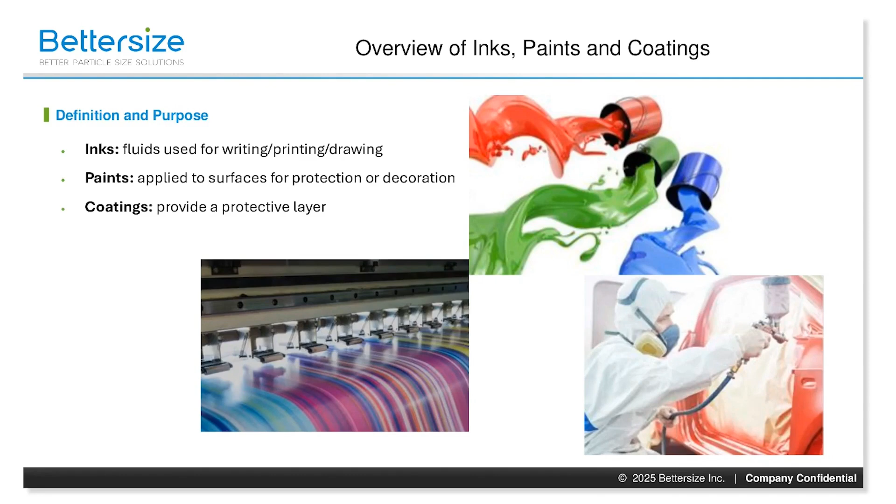Coatings are similar to paints, but are often designed for specific functional purposes beyond just appearance. They can provide protective, decorative, or functional properties to a surface, and are comprised of pigments, binders, solvents, additives, and fillers. These can include varnishes, lacquers, enamels, and other specialized formulations in industries such as automotive, aerospace, and construction.

So what do inks, paints, and coatings all have in common? They share the primary purpose of imparting color, protection, and specific functional properties to surfaces. They are comprised of similar fundamental components. Functionally, these materials rely on the effective dispersion of pigments to achieve uniform color and performance, and they often require stability to prevent settling, agglomeration, and other issues.

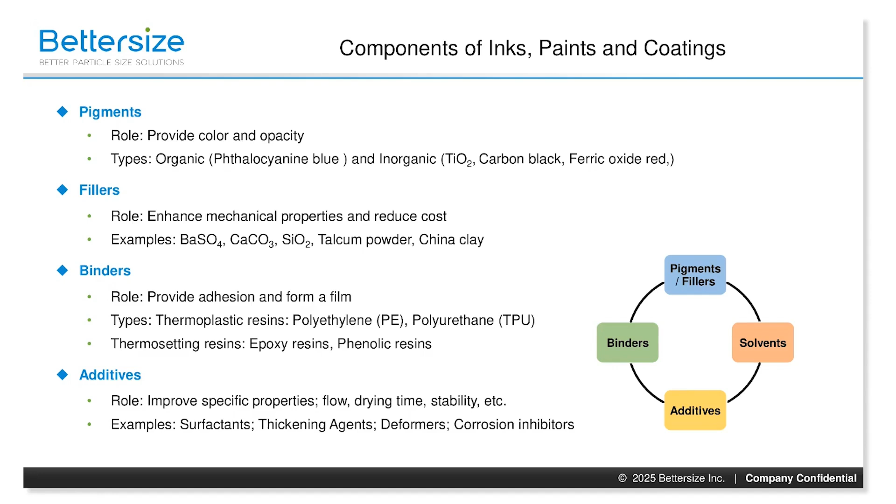Pigment is a material that exhibits a specific color because it selectively absorbs certain wavelengths of light. While many materials possess this property, pigments are stable at normal temperatures and have a high tinting strength, so only a small amount is needed to see the color when it's used on objects or mixed with a carrier.

Many of the critical properties of inks, paints, and coatings, such as their color strength, covering ability, surface finish, and durability, are determined by the sizes and shapes of the dispersed pigment particles.

So let's quickly review some definitions. What's a particle? A particle is a small unit of matter with defined physical properties such as mass, volume, and shape. Particles can widely vary in size and composition, ranging from subatomic particles like electrons and protons to larger particles like grains of sand. In the context of materials like inks, paints, and coatings, particles typically refer to the smaller solid components, such as pigments and fillers, that are dispersed within a liquid or solid medium to impart specific properties to the final product. Typical materials would include things like carbon black, titanium dioxide, and organic and inorganic pigments.

Now that we've defined what a particle is, here are some key particle parameters to consider. Particle size refers to a single value representing the measurement of the size of the diameter of an individual particle, while particle size distribution describes the proportion of particles of different sizes within a sample, not just the size of a single particle. This is often shown as a graphical representation. It provides information about the range, the ratio, and the distribution pattern of particle sizes across the sample.

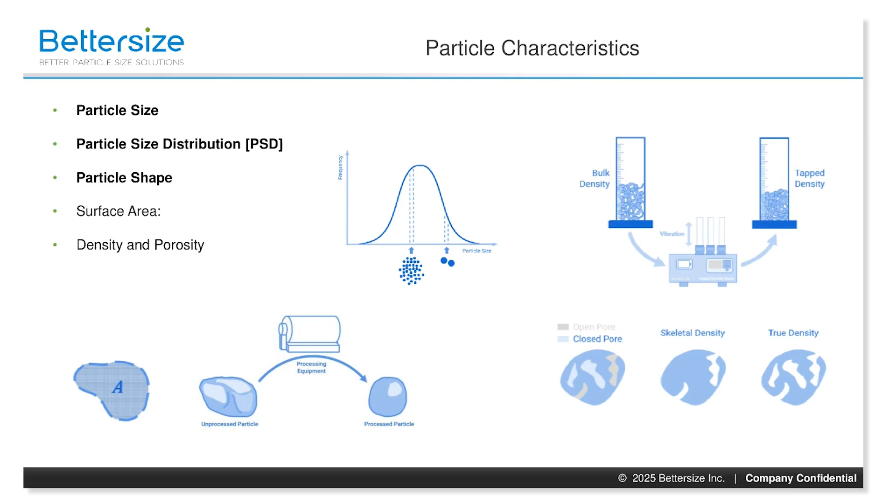I want to focus on particle size and the corresponding particle size distribution and particle shape, and their role in influencing pigment dispersion. Smaller particles are better dispersed and able to disperse more uniformly, and this can lead to even coverage. Irregularly shaped particles have larger surface area, which can enhance dispersion and stability. However, this can also lead to increased viscosity and potential settling.

If we move on to particle size influence on hiding power, opacity equals hiding power, so basically it's covering ability. Smaller particles have a larger surface area to volume ratio, as I've mentioned, and this allows them to scatter light more effectively. This increased scattering enhances the hiding power of the coating, making it more effective at covering the surface.

Particle size distribution: with a well-optimized distribution, you can get a mix of larger and smaller particles, and this can improve hiding power by maximizing light scatter and filling gaps in the coating.

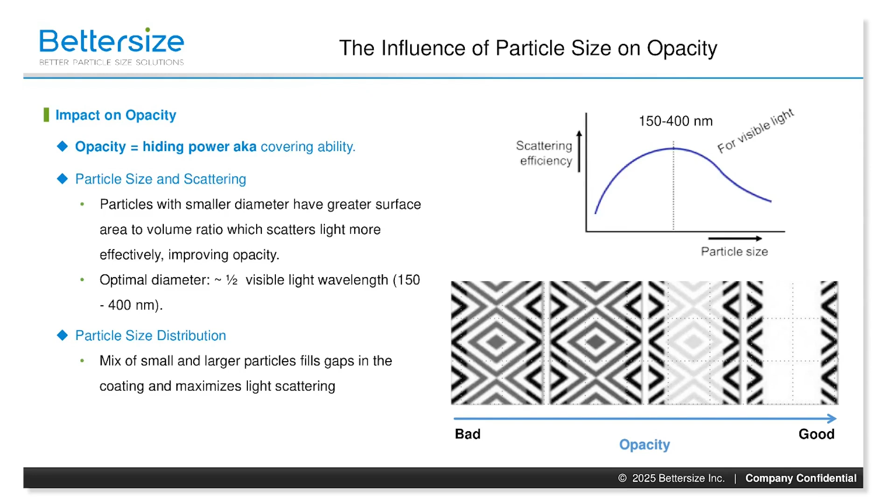So in summary, smaller particles generally enhance the hiding power of the coatings by scattering more light more effectively, while larger particles contribute less to the opacity. But optimizing the particle size distribution is key to achieving the desired level of hiding power within these materials of inks, paints, and coatings.

Moving on to the size and shape effects on the optical properties. Two phenomena govern both hiding power and the color strength of inks, paints, and coatings: light absorption and light scattering of the pigment particles within the material. Color strength refers to the intensity of color a pigment can impart to a material, which is directly related to the size of its particles.

Well-dispersed fine particles provide better color consistency and hiding power, resulting in vibrant color appearance, compared to larger, poorly dispersed particles, which tend to scatter light less effectively, resulting in a weaker color strength, leading to a more muted or dull appearance.

Particle shape: spherical particles can provide a smooth and uniform dispersion, which helps in achieving consistent color strength. Irregular shaped particles can scatter light in multiple directions, which can actually enhance the color strength. So an ideal distribution is a well-balanced distribution of particle size and shapes, which can enhance color strength by maximizing light absorption and scattering and result in more vibrant and intense colors.

Particle size analyzers like laser diffraction can be used to measure the particle size distribution of a pigment, which can then be correlated to its color strength.

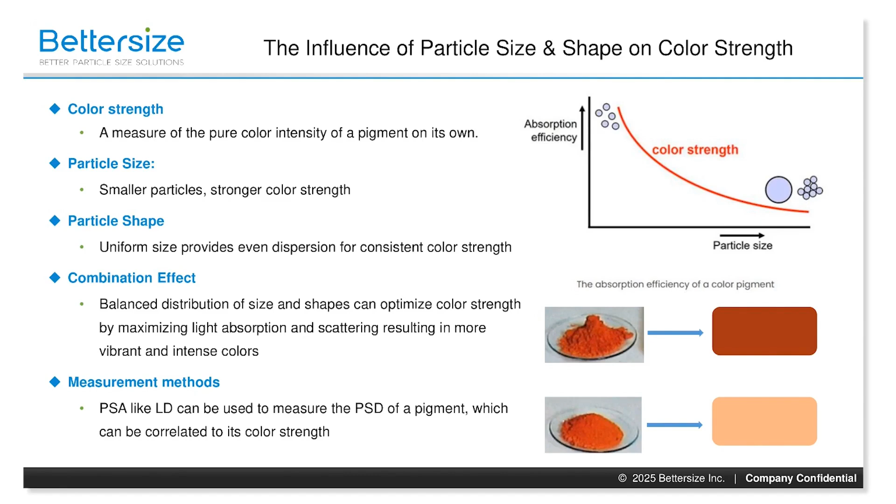Particle size and shape impact other characteristics of these materials. There's viscosity, where smaller particles with higher surface area increase the viscosity of the formulation, which affects the ease of application and leveling. However, irregular shapes can increase interactions with the surrounding fluid, and this can also lead to higher viscosity.

In terms of mechanical properties, smaller particles enhance smoothness and durability. However, irregular shapes can improve mechanical interlocking, enhancing properties like adhesion and scratch resistance. In terms of durability, smaller particles fill voids effectively, creating denser and more durable materials. But irregular shapes can enhance wear resistance and withstand mechanical stresses.

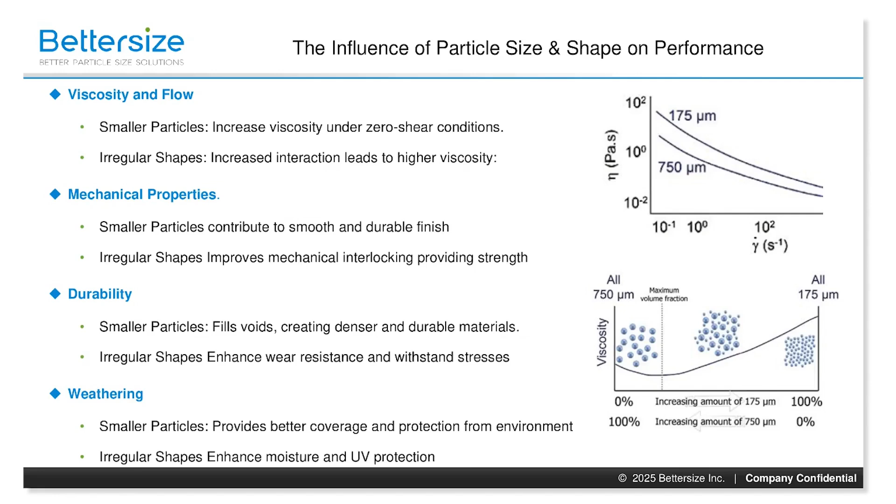In terms of weathering, smaller particles provide better coverage and protection against environmental factors. However, irregular shapes can enhance protection against moisture and UV radiation. In summary, both particle size and shape are critical factors that influence the dispersion, stability, hiding power, mechanical properties, and final appearance of inks, paints, and coatings. Proper optimization of these factors is essential for achieving high-performance formulations.

So next, I want to discuss the importance of stability and zeta potential. And of course, what is zeta potential? Zeta potential is not a property of the particle, but of the system comprised of the particle and the dispersion medium. Zeta potential is a measure of the electrical potential at the slipping plane of the particle in the medium. It indicates the degree of electrostatic repulsion or attraction between the particles.

High zeta potential means strong repulsion between particles, like common magnetic poles, which help prevent agglomeration and ensures stable dispersion. It's a critical parameter for understanding and controlling the stability of colloidal suspensions, such as those found in inks, paints, and coatings. There are many factors that affect zeta potential, including pH of the suspension, the ionic strength of the solution, the type of electrolyte ions, the temperature, which can affect the viscosity and dielectric constant of the medium, as well as the diffusion and mobility of the ions in the suspension.

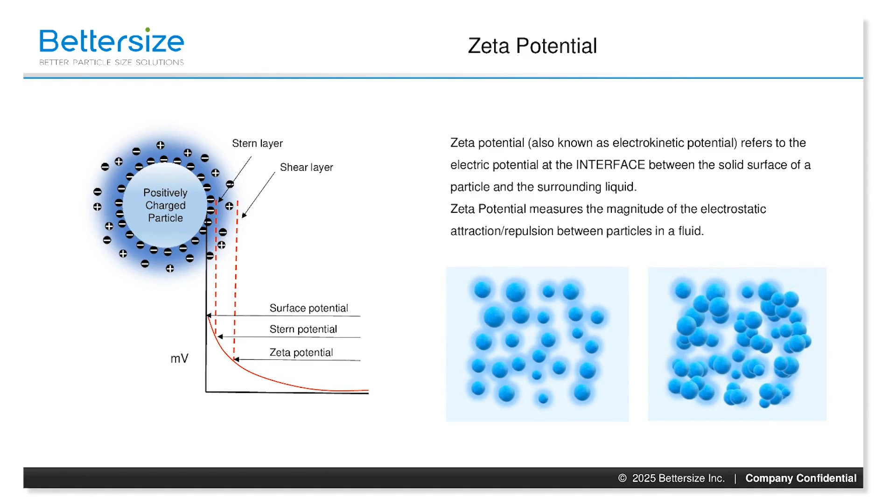Particle concentration can lead to particle-particle interactions, which can affect the overall zeta potential. Presence of surfactants, polymers, solvent properties, and surface modification of the particle with coating or functionalization can alter the surface charge and thus the zeta potential.

So what is the importance of zeta potential? Having high zeta potential controls particle stability. High zeta potential, either positive or negative, creates strong electrostatic repulsion between the particles. This repulsion avoids clumping and aggregation and prevents particles from coming together, forming stable suspension. Maintaining the high zeta potential ensures that particles remain evenly dispersed in the medium, preventing them from settling. It maintains that uniformity.

Electrostatic stability involves maintaining the forces that keep the particles apart, and this will prevent them from settling at the bottom of the container. By adjusting pH and conductivity, manufacturers can achieve the optimal zeta potential for stable dispersions. Using dispersing agents such as surfactants and stabilizers can be added to formulations to improve the electrostatic or steric repulsion between the forces, and this further enhances stability and prevents aggregation.

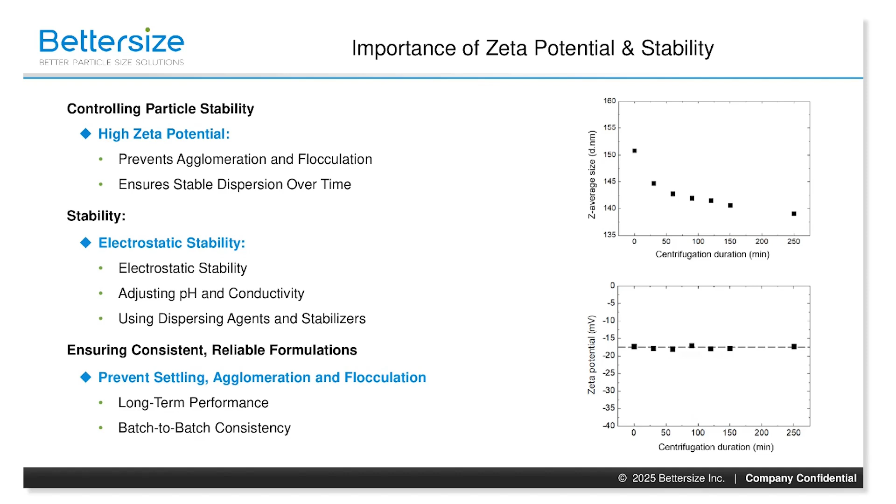By ensuring consistent and reliable formulations, it's dependent upon preventing settling, agglomeration, and flocculation. So manufacturers can ensure that they don't settle, aggregate, or flocculate, and maintain the properties throughout storage and application. Proper control of zeta potential and stability ensures that each batch of product has the same uniformity, performance, and quality, minimizing variations and defects.

So developing high quality inks, paints, and coatings involves navigating a range of formulation and processing challenges. Understanding and addressing these issues with targeted solutions ensures optimal performance and consistency across applications.

Common formulation challenges include achieving consistent particle size distribution. Here, the challenges involve smaller particles which may aggregate, forming large clusters that affect performance. Part of the solutions involve using advanced particle size analyzers to monitor and control particle size distribution, and employing dispersion techniques to break up aggregates and ensure uniform particle size.

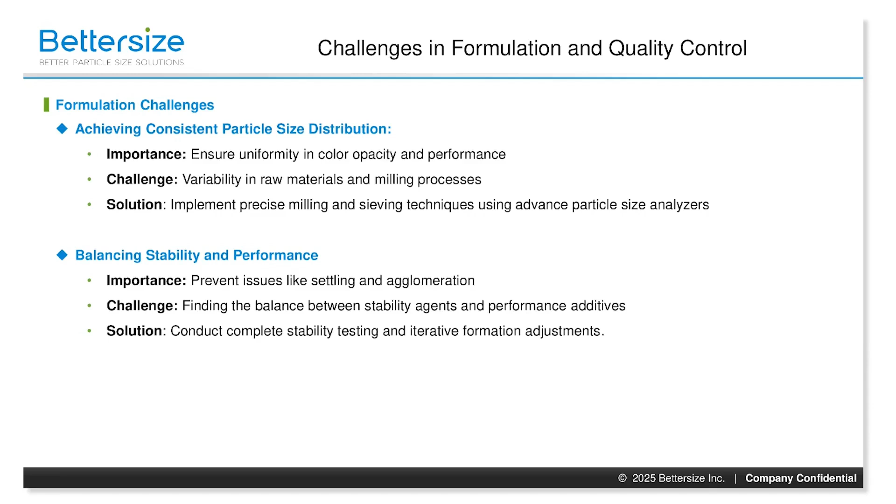In terms of balancing stability and performance, the challenge is when environmental factors such as temperature and humidity can affect the stability and performance. By conducting stability testing under various conditions, you can identify the optimal formulations and use stabilizers and performance enhancers that are compatible and synergistic.

In terms of processing issues, the goal is to prevent sedimentation and caking. This will ensure long shelf life and uniform application. The challenge is that particles can settle over time, leading to a separation of the components. And high viscosity formulations may be prone to caking, forming hard lumps, and are difficult to redisperse.

Solutions include using thickeners and stabilizers to maintain the suspension and prevent sedimentation. Controlling viscosity ensures a smooth flowing consistency, and optimizing storage conditions such as temperature and humidity to reduce the risk of caking. Another processing challenge is to ensure uniform mixing.

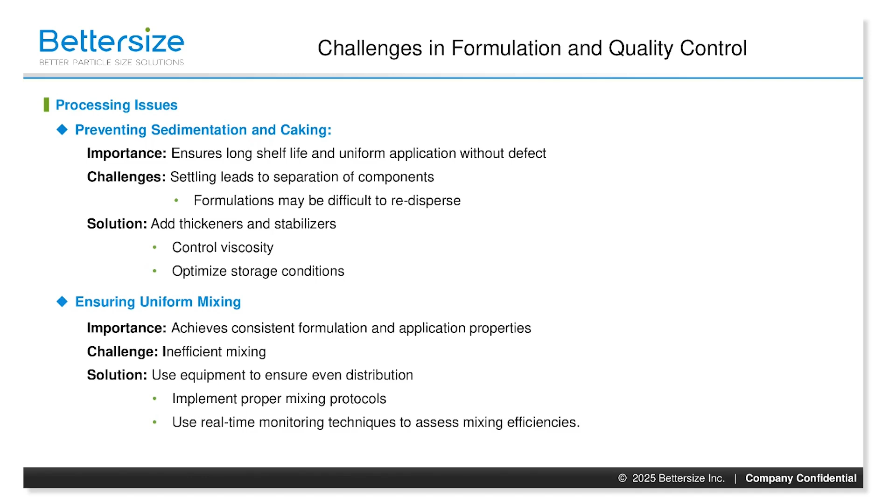It's important that we achieve consistent formulation and application properties to know that all components are evenly distributed. Inefficient mixing can lead to uneven distribution of the pigments, binders, and additives, and this will affect color and performance. This is especially important in large batches, as this may present difficulties in achieving thorough mixing. Solutions include mechanical mixers to break up the clumps and ensure even distribution. Using real-time monitoring techniques to assess mixing efficiency is important, and you can adjust the parameters as needed.

In terms of quality control, the goal is to maintain batch-to-batch consistency to ensure product reliability and customer satisfaction. Challenges arise from variability in raw materials and process conditions, which can lead to differences in color, viscosity, and performance.

Solutions include implementing strict quality control measures, including incoming raw material inspection and testing, developing and adhering to SOPs for production processes, and performing regular calibration and maintenance of equipment to ensure accuracy and reliability.

We also address environmental factors in order to maintain product performance under varying conditions, including temperature, humidity, and exposure to light. These environmental factors cause degradation of pigments, binders, and additives, leading to changes in color, stability, and performance.

Solutions include conducting environmental testing to assess the impact of these different conditions on product stability and performance, using robust formulation additives that are resistant to these environmental factors, and optimizing packaging to protect the products from external influences.

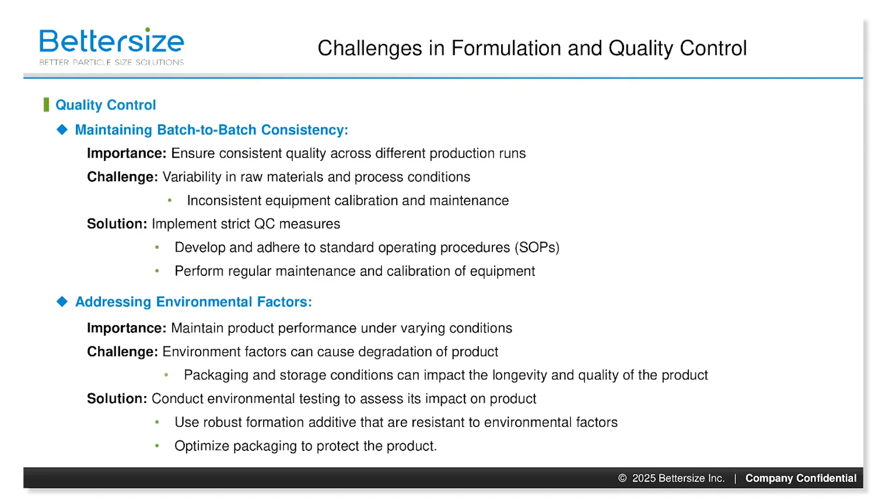A solution to address the challenges in formulations and quality control is to employ advanced characterization techniques. This provides detailed insights into particle properties and formulation performance, enabling precise control and optimization.

Examples include laser diffraction, which measures particle size distribution, ensuring uniformity and consistency; dynamic light scattering, which analyzes particle size and distribution in colloidal systems; and zeta potential measurement, which assesses the electrostatic stability of particles, preventing aggregation.

Rheology analysis evaluates the flow behavior of formulations, optimizing viscosity and application properties. Electron microscopy provides information on particle size, morphology, and surface topography.

Static multiple light scattering characterizes the stability of dispersions. Image analysis provides particle size, shape, and distribution information. And BET, Brunauer-Emmett-Teller, provides information about the particle size and porosity of a material.

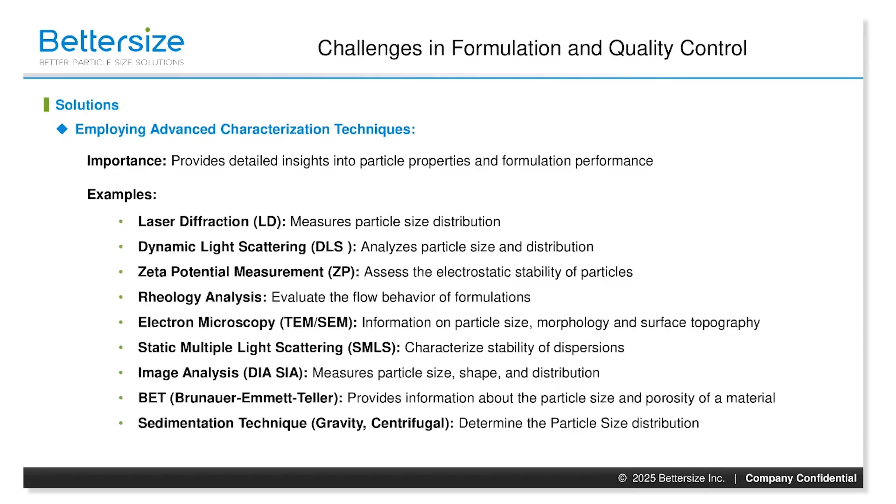Solutions to common challenges include optimizing formulation parameters. This enhances product performance and consistency by fine-tuning the composition and processing conditions.

One example would be to adjust the pH, which ensures optimal zeta potential and resulting stability, preventing issues like agglomeration and sedimentation. By selecting the appropriate stabilizers, this can enhance the dispersion and prevent the aggregation.

Fine-tuning the additive concentrations will balance performance and stability without compromising either aspect. Ensuring the right balance of these additives to achieve desired properties will add to the durability, gloss, and adhesion of these materials.

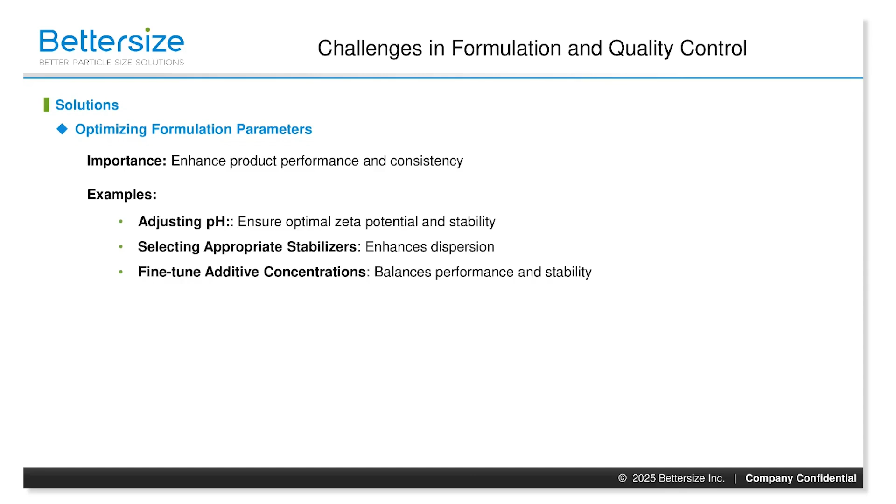So as we wrap up part one, let's highlight the critical aspects that impact the performance and quality of inks, paints, and coatings: the importance of particle size and shape, the role of zeta potential and stability, and the common challenges and solutions in formulation and quality control.

I hope I've helped you understand the importance of particle characterization and how to enhance and improve these products through particle analysis. Now I'll hand this over to my partner, Wei-Chen Gan, to explain how you can use particle size distribution, zeta potential, and stability analysis with some interesting case studies in part two of this presentation.

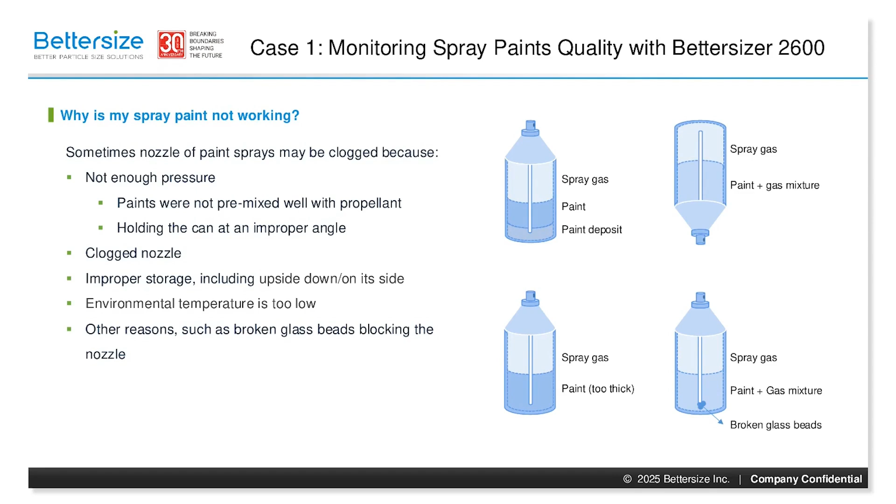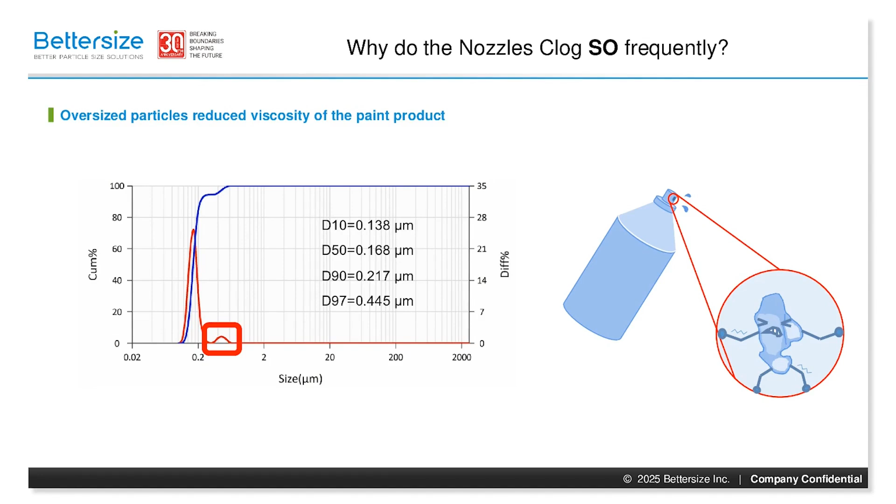These oversized particles can disrupt the optimal packing of smaller particles, reducing overall viscosity and leading to inconsistent flow and clogging. The animation on the right shows how agglomerates clog nozzles, leading to spray paint failure. The Bettersizer 2600 helped this paint provider identify and quantify these oversized particles, allowing them to adjust their process and solve the problem with an optimized grinding setup and finer filtration.

Now, let's talk about the Bettersizer 2600 laser diffraction particle size analyzer itself. Its tagline, 'Better particle sizing for every need,' really sums it up. This award-winning instrument, recognized with the 2024 i-NOVO Award, offers unparalleled measurement capabilities with its modular design, from paint suspensions

to pigment dry powders. With its unique optical design, the Bettersizer 2600 boasts an exceptionally wide particle size range, handling everything from 0.02 to 2,600 microns with wet dispersion and 0.1 to 2,600 microns with dry dispersion. Beyond size, the Bettersizer 2600 also measures particle shape, another crucial factor, thanks to the powerful PIC-1 image analysis module.

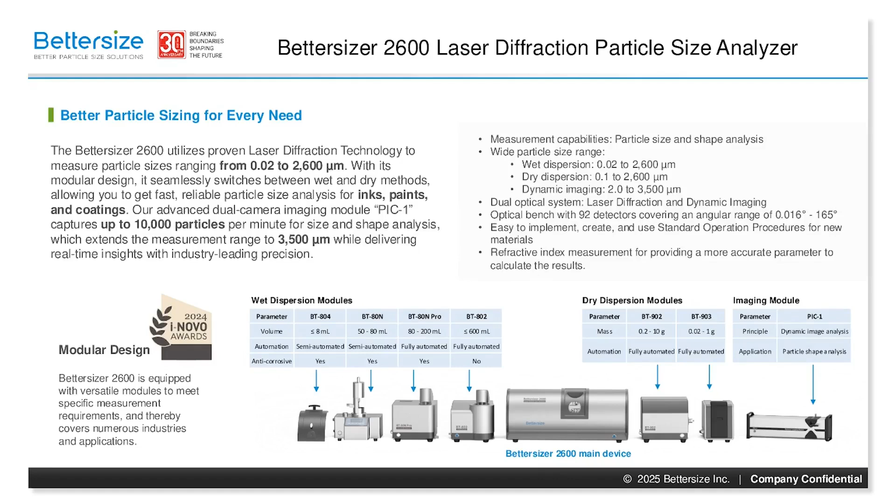For even larger particles, its dynamic imaging capability covers 2 to 3,500 microns. This versatility is achieved through its unique combination of laser diffraction for rapid size analysis and dynamic imaging for detailed shape information.

As a summary, let's talk about how we can measure particle size to optimize quality inspection. Traditional methods like sieving and filtering have long been an important part of paint production processes. Sieving physically separates particles, which is essential. However, it presents some challenges, especially when dealing with fine particles around 40 microns and below due to issues like

mesh size limitations and particle agglomeration. It can be difficult to handle these fine materials effectively, and the resolution and accuracy of sieving can be limited. While sieving provides a systematic and reliable process, the results themselves can lack the precision needed for modern formulations.

That's where the Bettersizer 2600 comes in. This advanced particle size analyzer allows us to precisely measure and control particle size distribution, ensuring consistent spray paint quality and minimizing those frustrating issues.

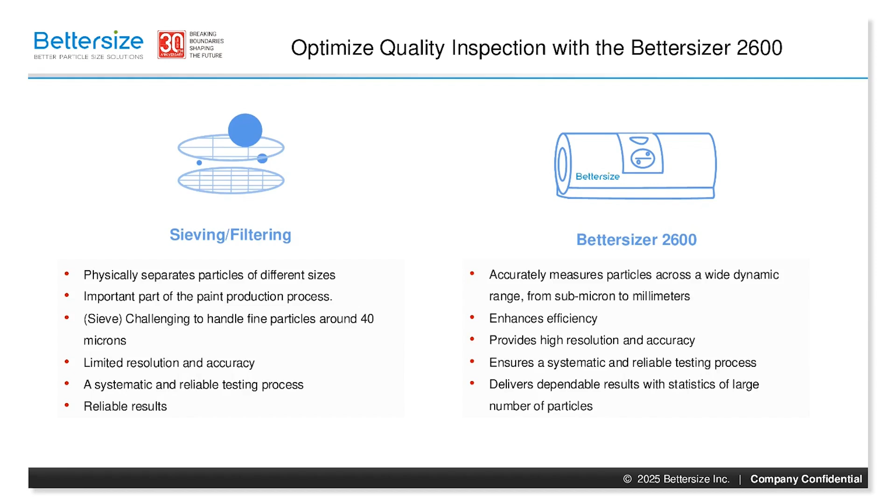Like sieving, it ensures a systematic and reliable testing process, but unlike sieving, it delivers dependable results with detailed statistics from a large number of particles. This allows for more precise quality control and optimization of your paint formulations.

We have seen how the Bettersizer 2600 revolutionizes particle size analysis in spray paints. Let's move on to our second case study, evaluating ink quality with a zeta potential test of the BeNano series.

Our second case study focuses on inks and the critical role of zeta potential. As the subtitle suggests, we are investigating nano-sized pigment dispersibility and stability in inks, a core challenge in ink formulation. A stable dispersion brings several key benefits: it prevents clogging, ensures consistent color output, maintains the correct ink viscosity, improves print resolution, and even extends shelf life.

This image on our right illustrates some common consequences of unstable dispersions: sedimentation, viscosity changes, and flocculation. In the following discussion, we will see how the BeNano instrument helps us understand the suspension stability to achieve optimal ink performance.

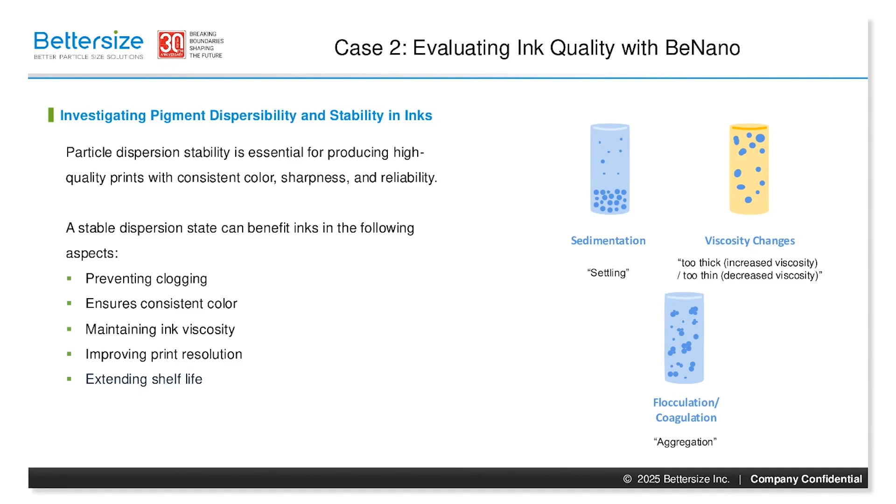Understanding suspension stability hinges on zeta potential. As mentioned by my colleague Dr. Barnum, the image on the right explains what zeta potential is: the electrokinetic potential at the outer layer of a particle. The zeta potential affects the concentration of charges around the particle, thus affecting the charge stabilization effect.

This chart on the left, based on empirical observations, demonstrates the direct impact of zeta potential on suspension stability, revealing the following change: as the absolute value of zeta potential increases, the suspension system becomes more stable due to charge stabilization. However, please note that the values listed here serve as general guidelines, not absolute thresholds.

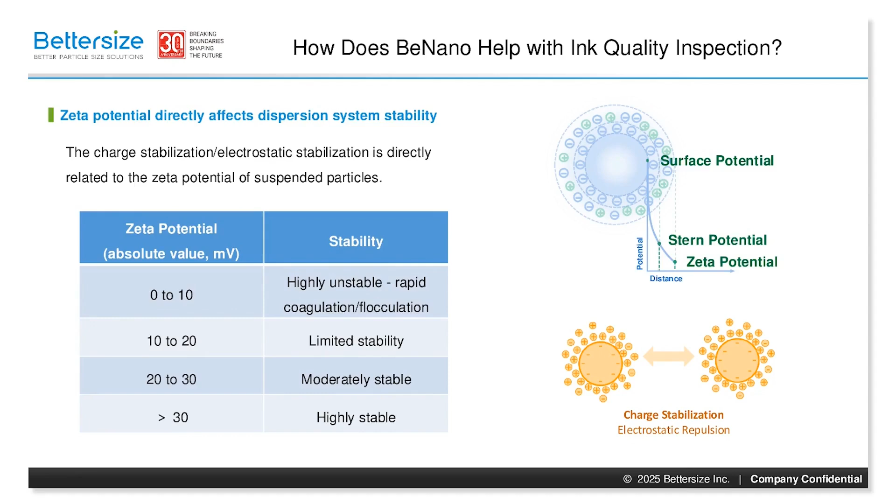Knowing the zeta potential lets us make targeted adjustments for ink stability. We can make the adjustment in several ways. For example, in water-based inks, we can change the environment's pH by adding acids or bases, which alters the surface charge of the pigment particles.

Or we can also change the ionic strength by adding salts. This affects the double layer around the particles.

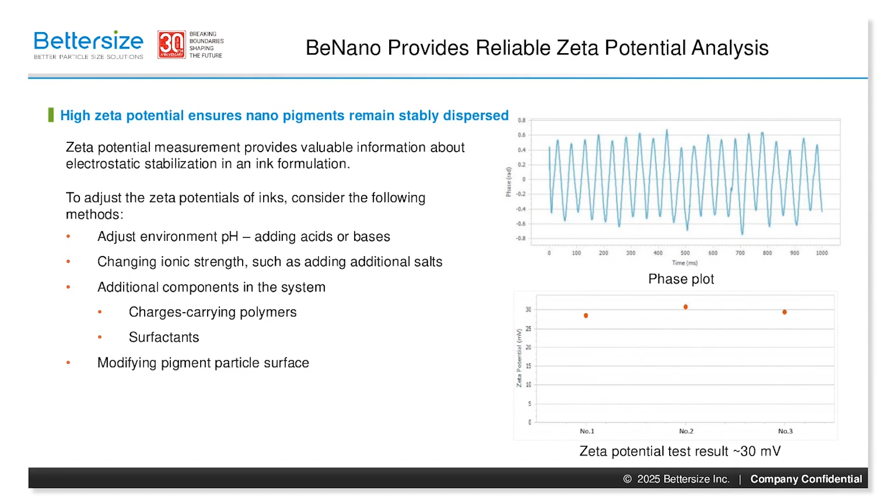Here is the star of our show for ink analysis, the BeNano nanoparticle size and zeta potential analyzer, striving to be the nanoparticle expert you need. This powerful instrument is designed for precision and versatility. For zeta potential measurement, even samples with low electrophoretic mobility, which can be particularly challenging, are no problem, thanks to its pulse technology.

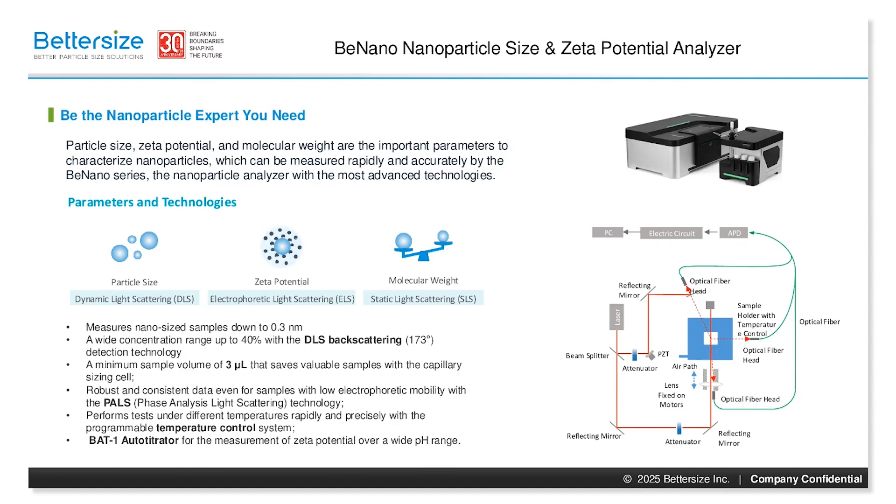For comprehensive zeta potential analysis across a wide pH range, the BAT-1 Autotitrator is seamlessly integrated. It also measures the size of nano-sized samples down to an incredible 0.3 nanometers, covering a wide range of particle sizes. Its wide concentration range up to 40% is made possible by its DLS backscattering technology.

Finally, let's turn our attention to our third and final case study, analyzing the stability of coatings. Just like Dr. Barnum mentioned in the first part, stable dispersion systems rely on a combination of factors, not just one. We have already discussed the crucial role of zeta potential in the last case, but other key factors come into play. These include steric hindrance, particle size, density, viscosity, pH range, and temperature. A truly stable coating requires careful optimization of all these interacting parameters.

How do we analyze the stability of coatings and other suspension systems in general? Static multiple light scattering, or SMLS, is a powerful, non-destructive, simple, and fast technique. As you can see, SMLS shines a light source on the sample, and the resulting light is collected by detectors. The whole optical system scans across the sample, collecting resulting optical signal data over time.

Usually, an SMLS instrument provides both transmitting and backscattering optical signal data. Because coatings are typically opaque, transmitted light signals are often weak, making backscatter light a more reliable indicator of changes within the sample. Therefore, backscatter light is preferred for an SMLS analysis of coatings.

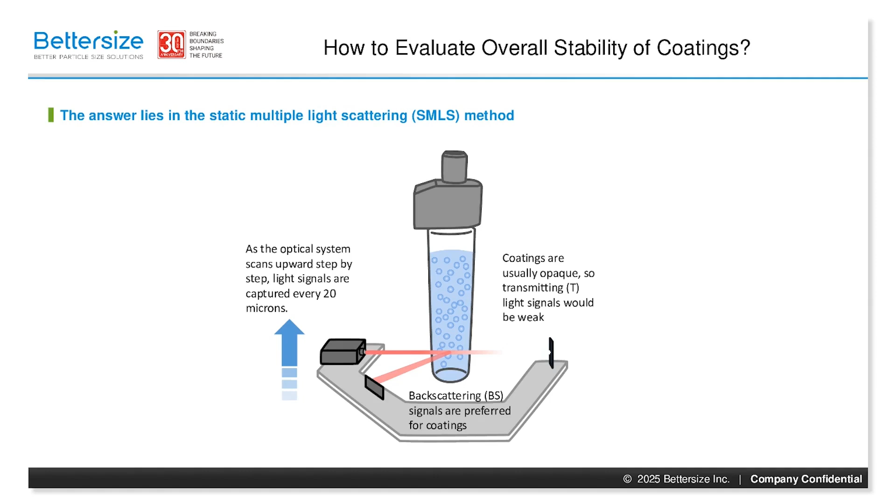The signal collected by the SMLS instrument is recorded into two forms: raw data and delta data. Raw data represents the original unprocessed signal detected by the forward or backward detectors. It's the baseline we use for comparison. The delta data, on the other hand, tells us about change. It's calculated by differencing subsequent scans from a reference scan, which is typically the very first scan. The delta data provides a quantitative method to understand how the sample structure evolves over time.

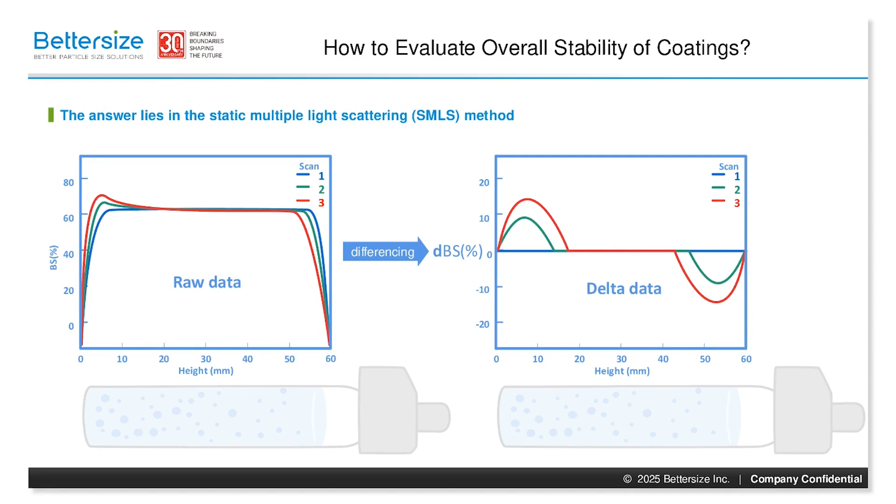For example, here we show an ideal sedimentation backscattered raw and delta data. The delta data exhibits a characteristic pattern. Backscatter light is getting stronger at the bottom of the bottle and vice versa at the top. That indicates particle concentration on the top is reducing and at the bottom it is growing, which means particles are migrating from the top to the bottom. Yes, that indicates sedimentation.

But how do we quantify stability? We use the instability index. The instability index is calculated by accumulating the differences between a successive scan and a previous scan. These differences are then mathematically combined into a single value that represents the stability for the whole sample at one corresponding scan. If one scan has a lower IUS value, say 0.5, it indicates that at this moment the system is in a stable status. On the contrary, if the IUS value is larger than 10, you may be witnessing an obviously unstable phenomenon like sedimentation, flocculation, or delamination.

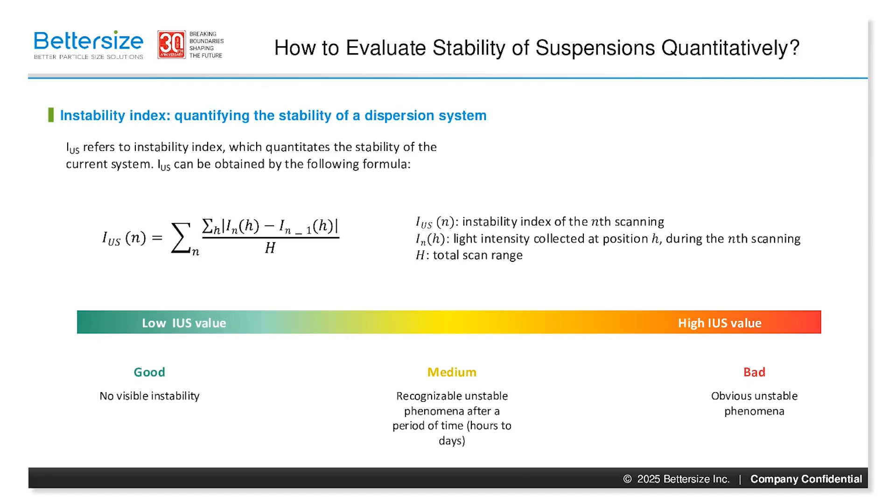The instability index provides an elaborate view of stability, capturing both discrete snapshots of stability at specific moments and revealing the dynamic evolution of the system over time. Thus, we can make informed decisions about formulation optimization.

However, while the instability index provides a convenient and quantitative way to assess overall stability, it's important to remember that it doesn't tell the whole story. It gives us numbers and curves, but it doesn't specify how the system is destabilizing, whether through sedimentation, agglomeration, or some other mechanism. For that level of detail, we need to return to the delta data.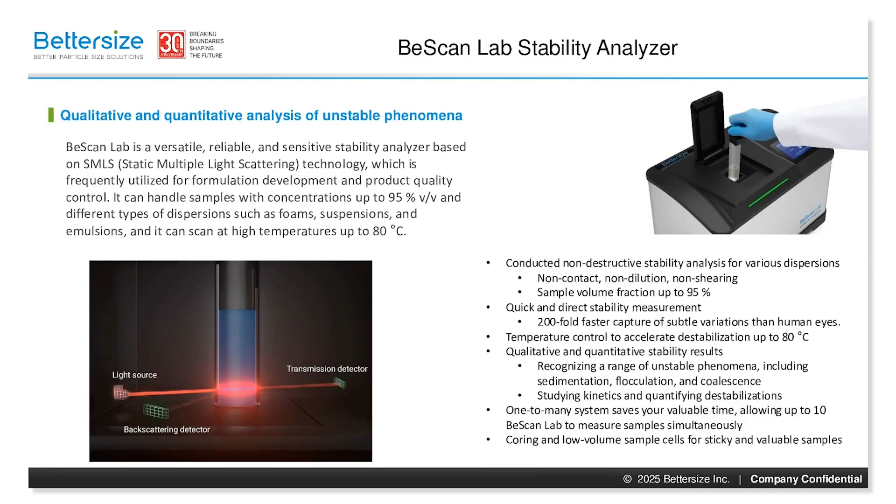To summarize our exploration of particle characterization, let's consider how to choose the right tool for the job. Both electrophoretic light scattering, the ELS, and static multiple light scattering, the SMLS, offer valuable insights, but they are best suited for different applications. Choose the SMLS when you need a comprehensive evaluation of stability, including both qualitative and quantitative analysis. It is also worth noting that the SMLS provides a quantitative view of stability dynamics, revealing how quickly a system changes over time and providing insights for optimizing formulations and ensuring product quality.

SMLS is ideal when you have sufficient sample volume, typically 4 to 25 milliliters, and when dealing with high viscosity and highly concentrated samples. On the other hand, ELS is the preferred choice when you focus on electrostatic stabilization. It's perfect for rapid stability evaluations, often requiring less than a minute. ELS is also essential when working with limited sample sizes, as it only needs 0.75 to 1.5 milliliters.

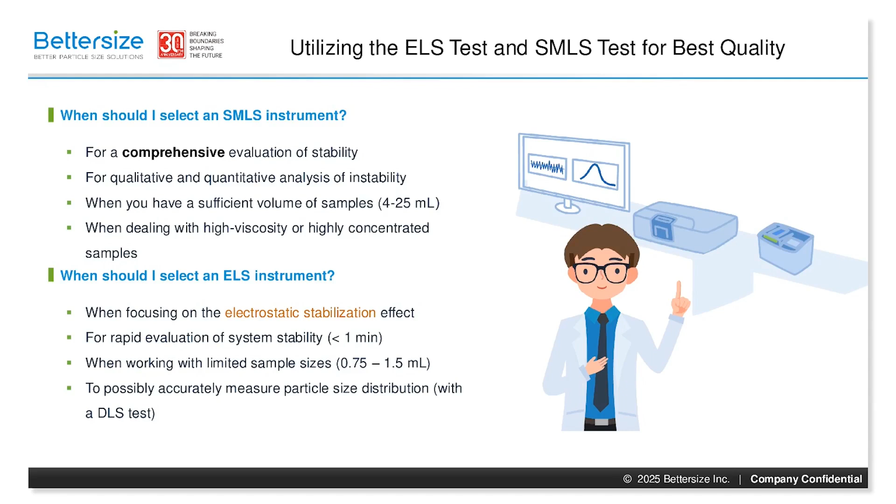And remember, ELS testing can also provide valuable information about particle size distribution through a DLS test. By carefully considering these factors, you can select the optimal technique for your specific needs, ensuring the best possible quality for your products.

These are just a few of many success stories we have seen with Bettersize products. Leading brands in the paint, ink, and coating industries rely on Bettersize products for their particle characterization needs, from optimizing ink formulations for vibrant packaging, just like the case study we saw earlier, to ensuring the precise particle size for critical pigments in coatings. And the list continues to grow. We are proud to partner with companies that are pushing the boundaries of innovation, and we are committed to providing them with the tools they need to succeed.

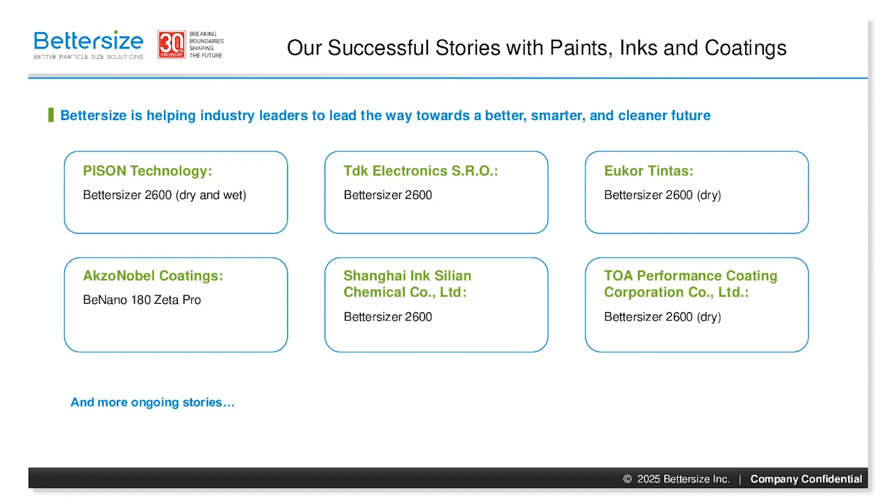Let's recap what we have covered today. We began by understanding the critical role of particle size in spray paint quality and how the Bettersizer 2600 helps manufacturers identify and control oversized particles to prevent nozzle clogging, thus ensuring consistent product. We then explored the importance of zeta potential in ink stability and how the BeNano instrument helps control this crucial parameter.

Leading to optimized ink formulation with superior color consistency and shelf life. Finally, we delve into the world of coating stability, demonstrating how static multiple light scattering and the BeScan Lab analyzer provide both qualitative and quantitative insights into destabilization mechanisms, allowing for rapid and effective coating formulation development.

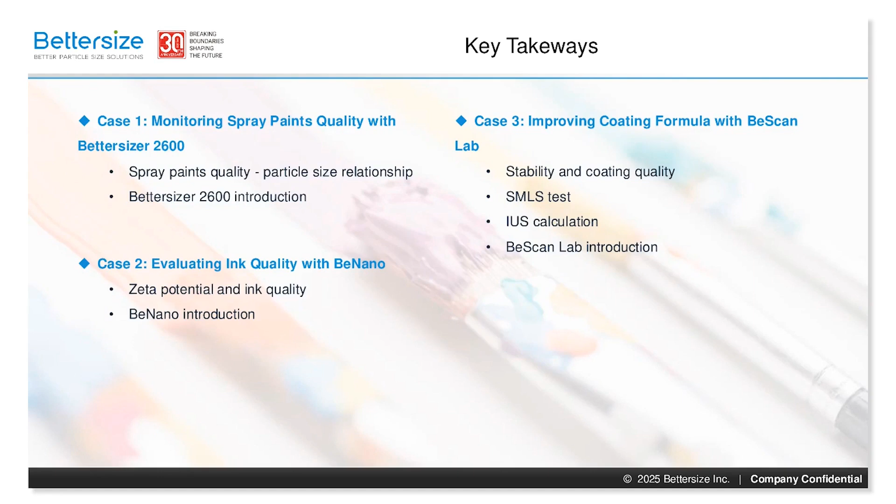From optimizing particle size in spray paints to ensuring ink stability and analyzing complex coatings, Bettersize offers a comprehensive suite of solutions for particle characterization.